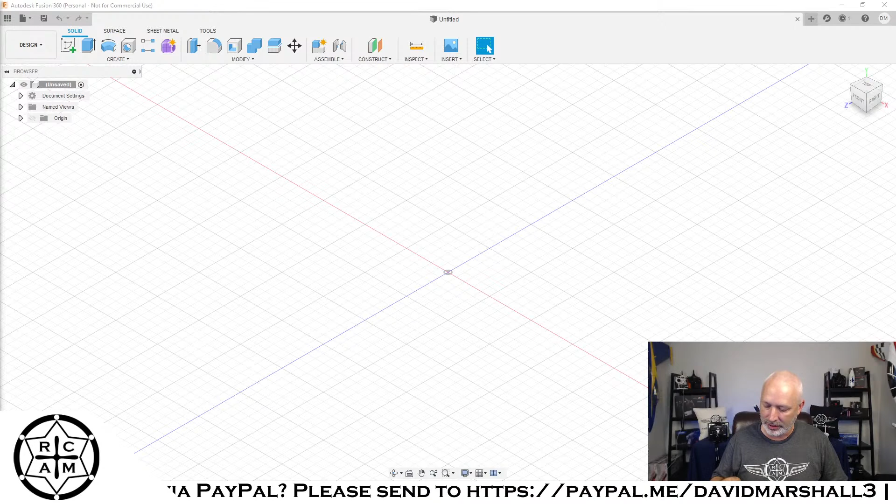The first thing I'm going to do is measure out this little GPS module. Like I said, it's right about 20 millimeters wide. Yeah, it's right at 20 millimeters on all sides.

So the first thing I'm going to do is make a box that is about 20 by 20. I'm going to make it a little bit longer.

Colorado's burning on fire. Hope you're all right, man. Stay out of that. Stay away from the fire.

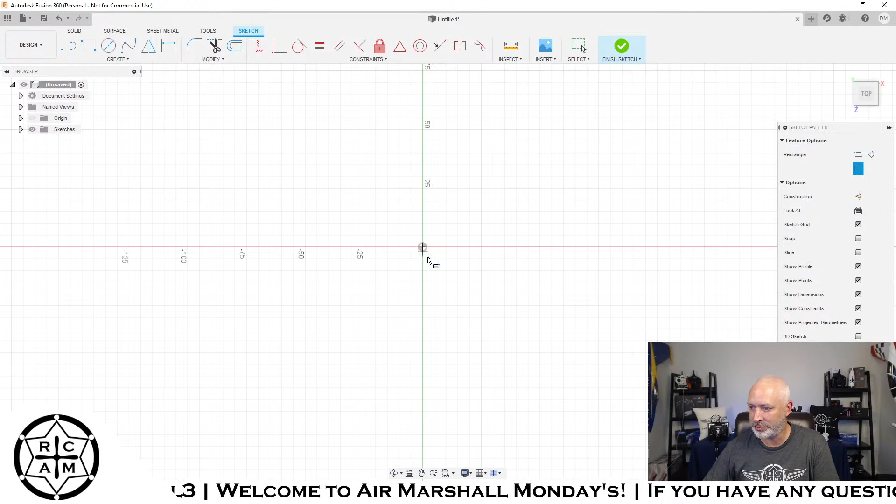That's bad. So we're going to do a center rectangle right here on the origin, and we're going to make it 20, actually 20.1, just to add a little tolerance.

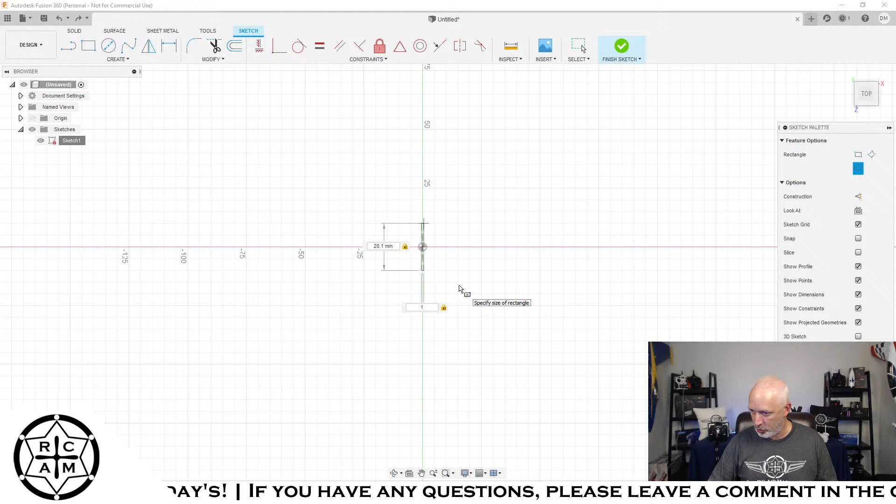Let's just delete that. So we'll do another center rectangle, 20.1, and now we'll hit enter.

So that'll be kind of the start of our little project. That's the first part of it, the first square that we're going to use.

And then we're going to do something called an offset. We're going to take that whole thing and do another square right outside of it. So we should be able to take those four lines and do... I thought we could do something. Cool.

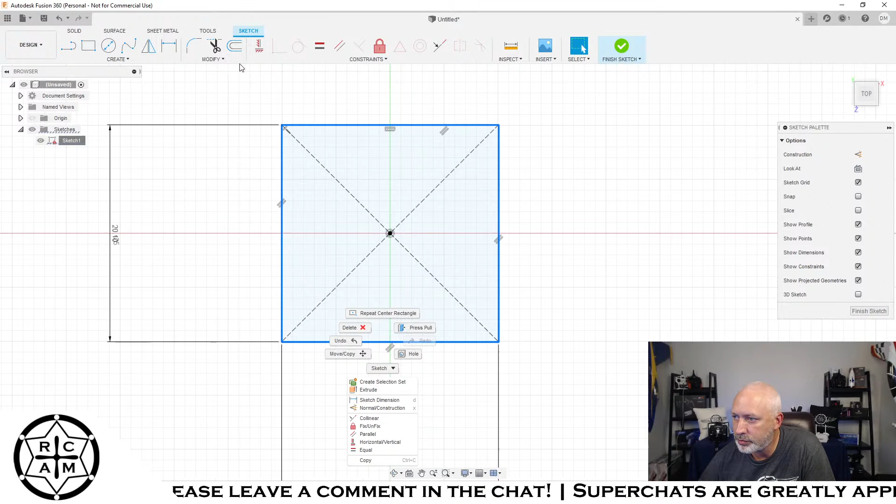Well, we'll just do a whole new center rectangle, because I also want a standoff in the center that is about 0.75 millimeters away from that. We also want the surrounding area to be 2 millimeters, so we have like a 2 millimeter wall that surrounds the GPS module. So we're going to do another center rectangle that is 22.1.

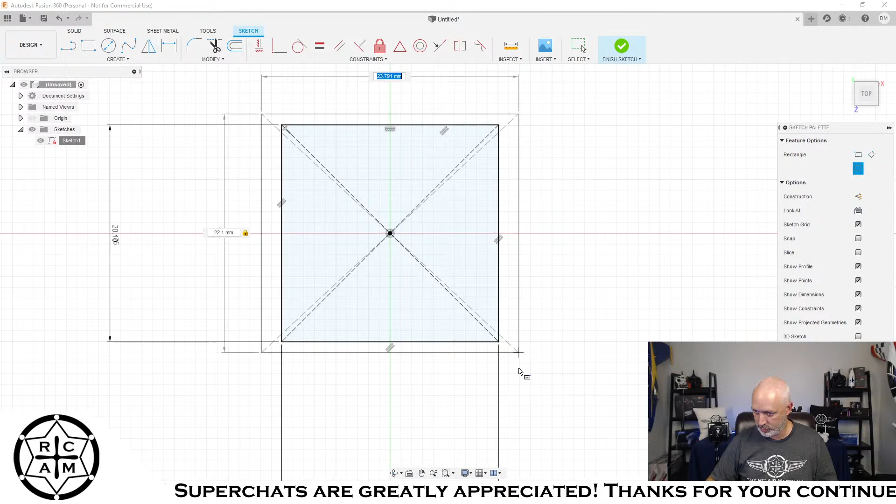All right, so that's going to give us our external walls. And right on the inside, we want about a 0.75 millimeter standoff that the circuit board is going to sit on, on all sides, and that is going to lift the circuit board up off the base of the mount. There's little plugs on the bottom that need some clearance. I don't want it sitting on those plugs, I want it raised above them by just a little bit. So that lip it rests on, on those four sides, is going to be about 0.75 millimeters thick.

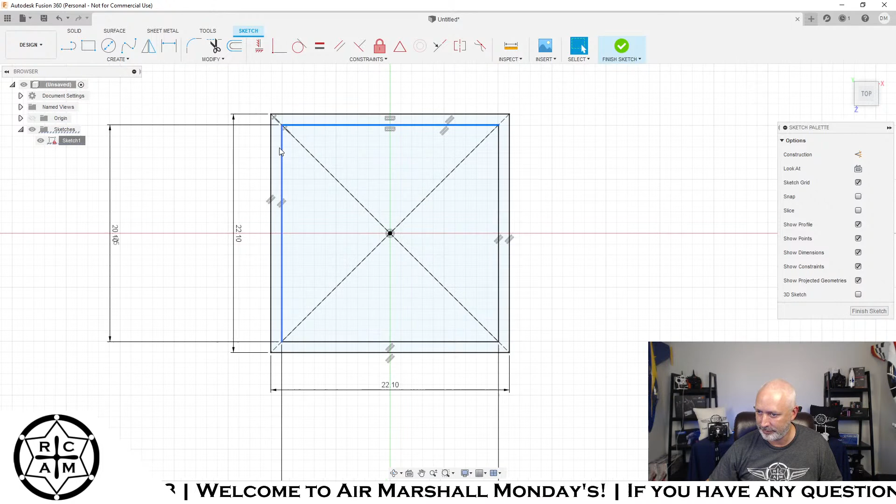And that's where it would come in really handy if I could remember how to do the offsets. I don't remember how to do that. I should probably watch a video of someone doing this who's smarter than I am.

There it is. But that's not what I wanted to do an offset of. I want to do an offset of that. Oh, I get it, okay.

So we want to go in by negative 0.75.

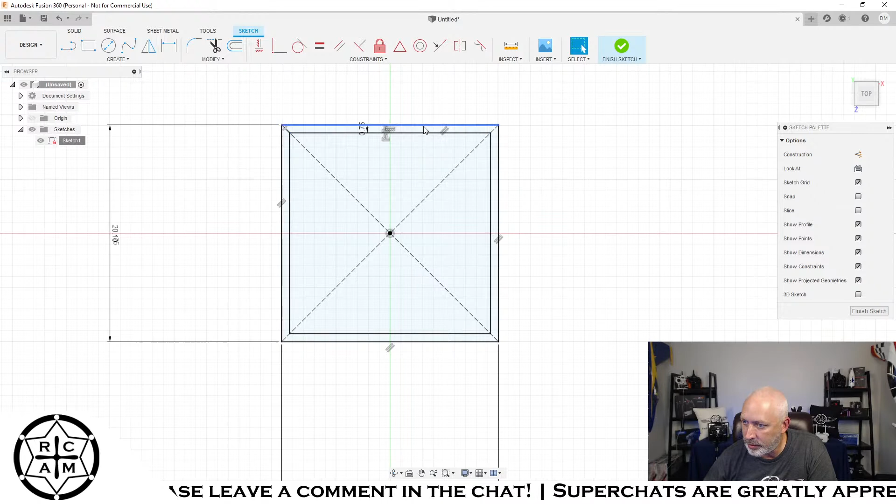Awesome. And also that one is a little messed up, so we're just going to delete that whole guy right there, and we should probably delete all the dimensions associated with it. Okay, and we're going to do another offset of that outside that is 2 millimeters instead of 1. We'll go 2 millimeter offset.

Perfect, all right, so now we've got our base sketch. And what we're going to do is go ahead and finish that sketch, and we're going to start extruding some things, right?

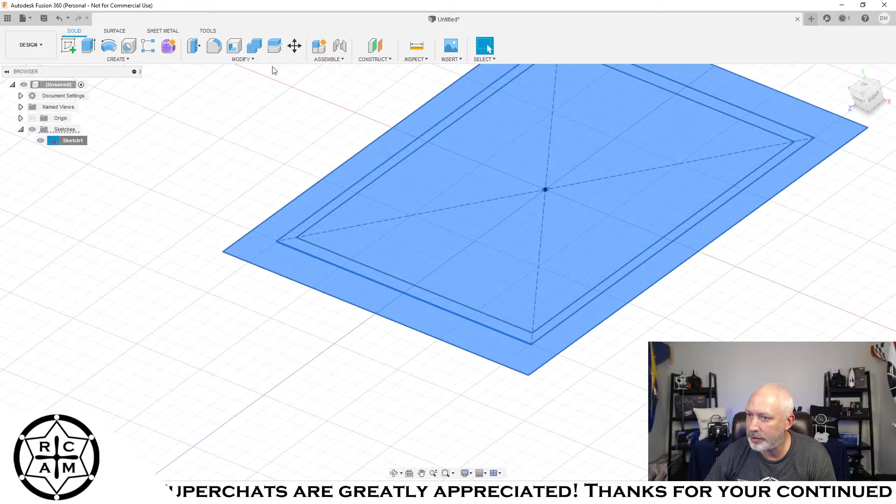So we want this whole thing, all of these areas, to be 2 millimeters thick on the bottom, on the base. So we're going to extrude it up by 2 millimeters. Come on, thing, do what I want. Awesome.

Oh, you know what, I just kind of messed up a little bit. Not really, I probably should have done that first, but this will still work. We can show that sketch again, and we're going to draw everything else up from the bottom, and that's fine. Actually, we could still do it from the top.

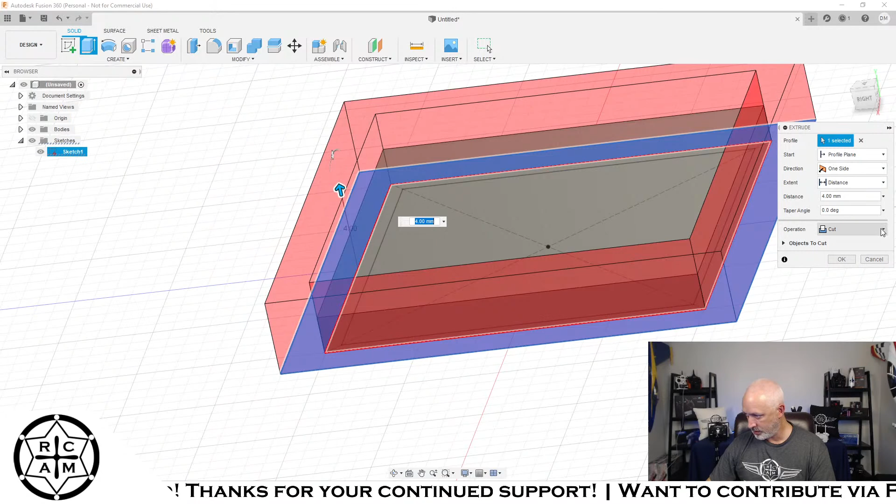So instead of cut, we're going to join, and we're going to hit OK. So that gives us our initial tray.

Now we may need to come up from there a little higher, just based on the height of the circuit board that I'm working with. That is, let's see, 4.35. We're actually going to make it just the same height as the rest, which is 10.73. So we'll make it 10.75 tall. So this has like a little bit of a protective shroud around it.

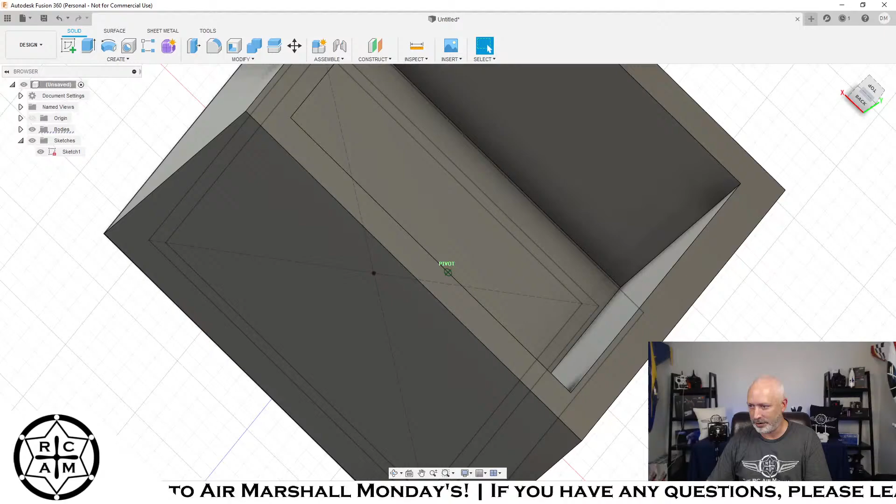So if it gets knocked by anything, it hopefully won't destroy it. So we're going to just raise that. We'll go ahead and make it 11, so we're going to add 9 more millimeters to the extrusion here. That's going to make the box a little bigger than it used to be, and that's okay. That's exactly what we are looking for, a little box for this thing to sit in.

Now, the next thing that we want to do is we want to raise that offset that will allow this thing to be sitting a little higher, or not sitting directly on those plugs. There's little connectors on the front and the back, and I don't want it sitting directly on those connectors. So we are going to make some small standoffs that are just slightly taller than the plugs.

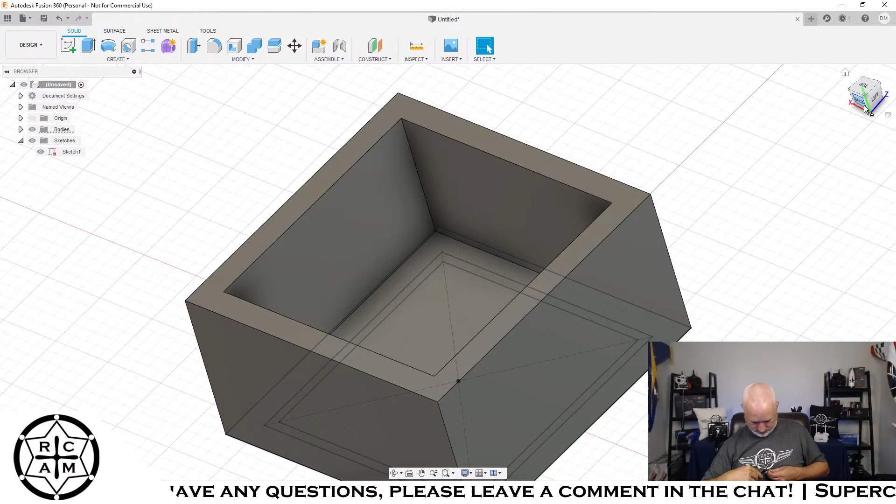And the plugs look like they're about 3.1 millimeters. So I want those standoffs to be about 3.5 millimeters, which will leave us about a 0.5 millimeter gap between the plug and the bottom of this little case that thing is going to sit in.

And you know, we're kind of extruding from the bottom, which is a little weird. I just kind of messed it up. I probably should have made the initial base square first and then extruded from there, but that's not what I did.

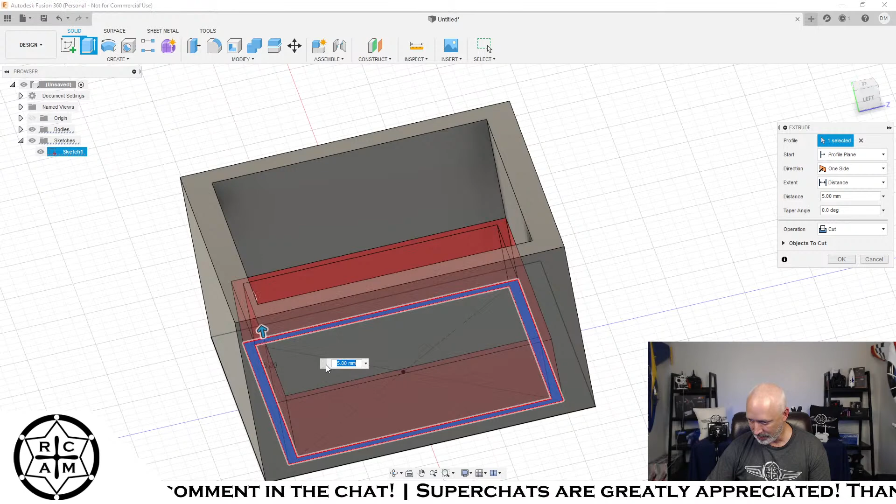So we're going to go ahead and tell it to extrude. Now this is already 0.75 millimeters, so it's the right thickness, and as we extrude that up, that's our initial 2 millimeters, and we need to go another 3.5. So we're going to make it 5.5.

Oh, oops. So we want to delete that last extrusion. I accidentally did cut instead of join. So we're going to do that again. 5.5. Join.

Okay, all right. Now what we'll see is around the perimeter of the box, you can see that there's a small ledge, and that small ledge should be 3.5 millimeters tall.

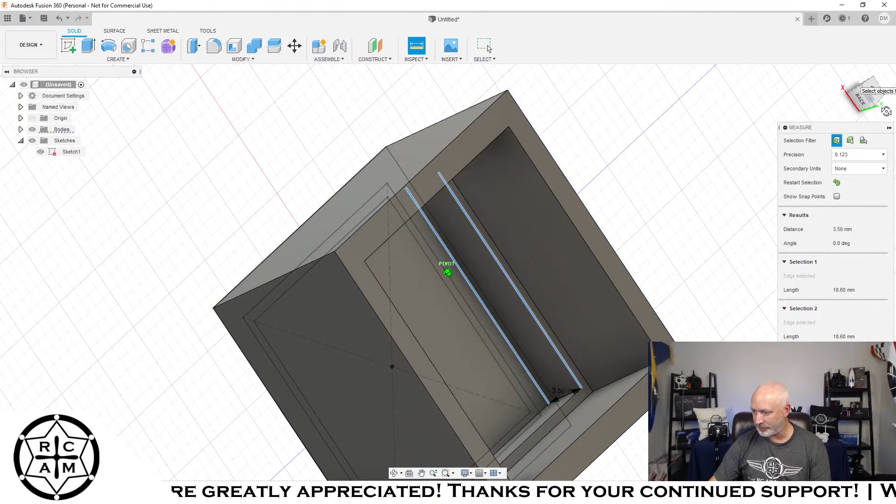And what we can do is if we want to check those dimensions, we can do inspect. We can measure from here to here, and we can see the dimension in there. It has right over here that it's 3.5 millimeters. We can see also here the distance is 3.5 millimeters. So we did extrude it the right height. It is 3.5 millimeters tall, that standoff, and that's going to give us the room that we need to allow the circuit board to rest on that standoff instead of the bottom just sitting right on the bottom of that base.

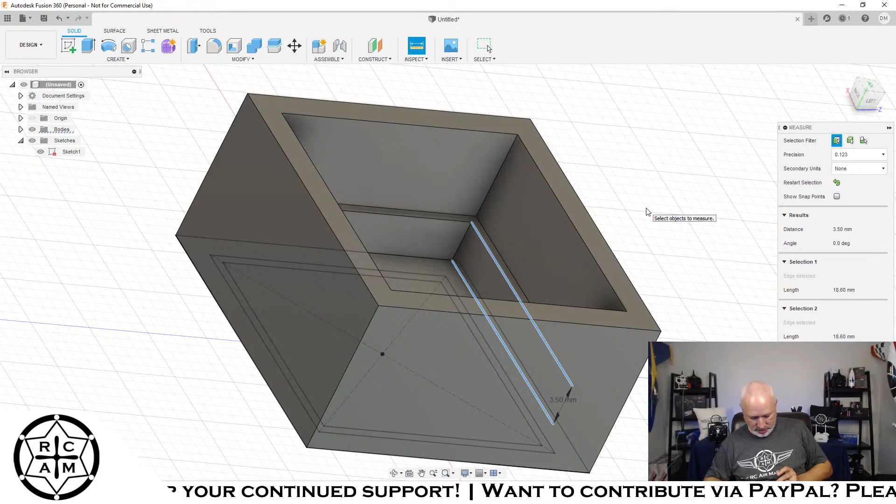Now, the next part that we need to figure out is we do have a plug that goes into the bottom. So where this thing is going to sit down in that case, I need to have an opening for that plug. Now this is perfectly square, so I can have that opening basically anywhere that I want, and I need to have that on both sides. One will just be a cutaway, and the other will be, we're just going to remove that area.

We can go ahead and close that measurement. The other one will be removing, hold on, let me get this oriented the way I want it. And we can turn off that sketch because I don't need that anymore. So basically what we're doing is we're going to cut a hole out of the back of this thing.

And on one side, and on the other side, we're just going to cut a groove into this standoff where it can sit down in there properly. So we're going to start on the area, we want that to be the back of the box. So we're going to start a sketch on this surface of the outside of the box.

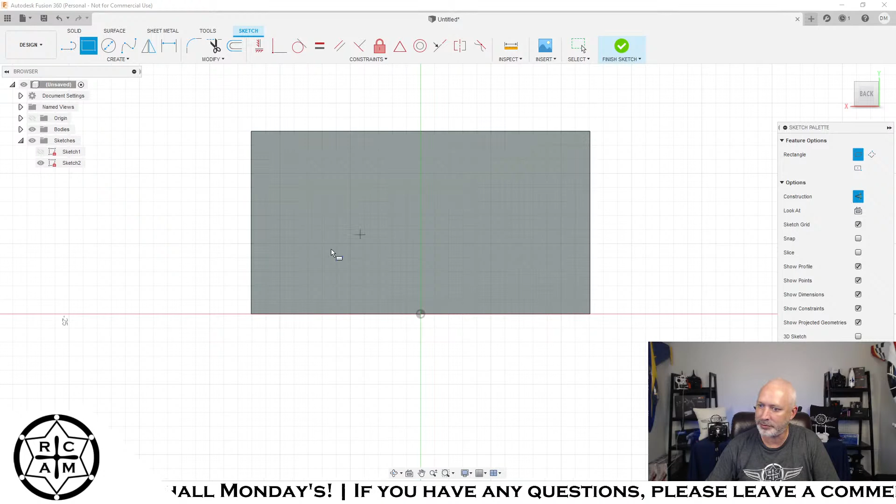And the first thing we're going to do is we're going to draw a construction rectangle that is 2 millimeters tall and the entire width of the box. And the reason we're doing that is because that is going to tell us where the base is. So 2 and 24.10 is correct.

Now, everything above that line is above the actual floor of the case, right? So we're making like a little case here. So what I want to do from here, we also want to make another construction rectangle that is 3.5 millimeters tall. All right, and what that's going to do is it's going to tell us where the top of that ledge is.

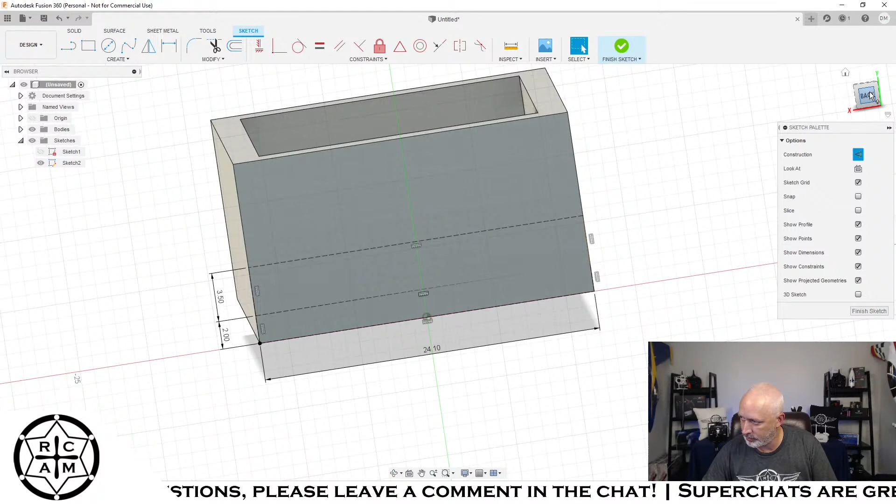Now what we want is a hole created right in this area where the plug for the GPS module can go into, with it sitting down into the case. This is the back of the case. We want to measure how far it is from the side of the plug.

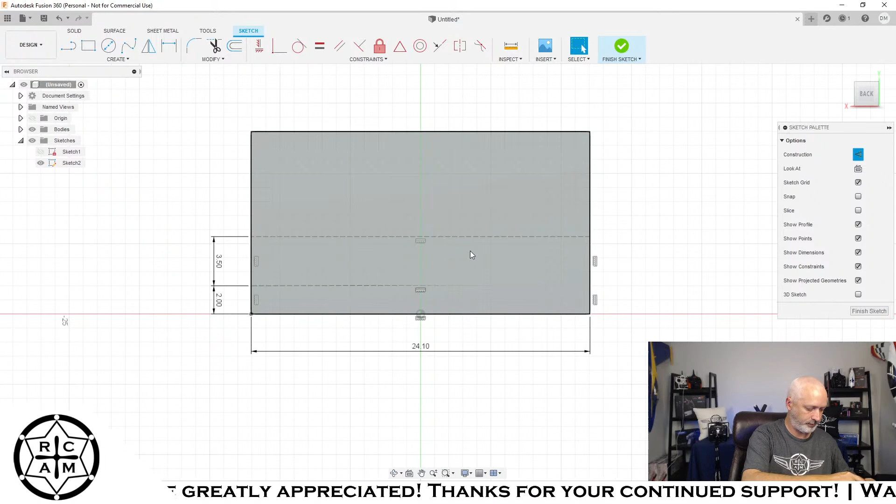That's 5.88, so we'll do 5 millimeters. It looks like we can just do 5 millimeters on both sides, and that's going to give us the clearance we need for that plug. So we're going to do 2 more of these.

And these construction rectangles are more like reference points, right? So that's 13, and we'll do 5 millimeters. We'll draw one more that is 13 by 5 millimeters.

All right, and we're going to go all the way to the floor, and we'll go 1 millimeter above to make sure we've got plenty of clearance there between those. So this next one that we draw is not going to be a construction, because it's not for reference. This is actually going to be a cutting tool that we're going to use.

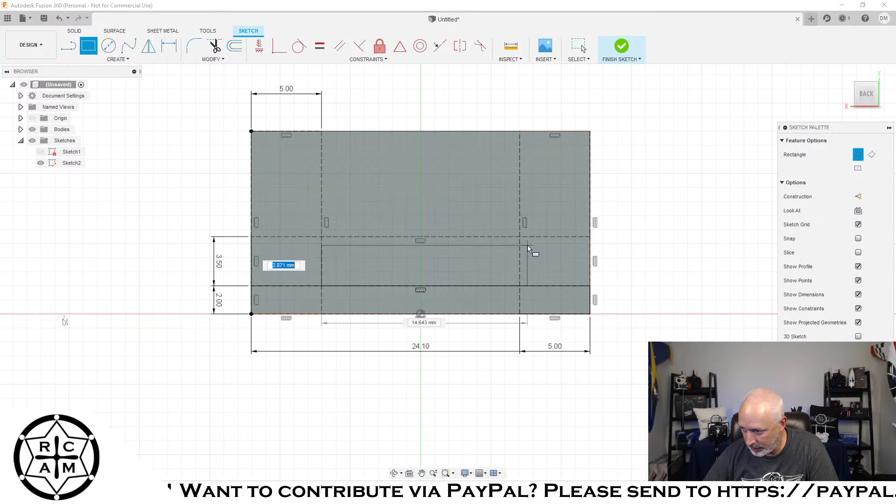So that's 3.5, so we'll make it 14.1. Let's see what the actual measurement is there, because I know I'm giving myself some extra room. Yeah, the thing is only 8. I know what it is - the sides are also 2 millimeters.

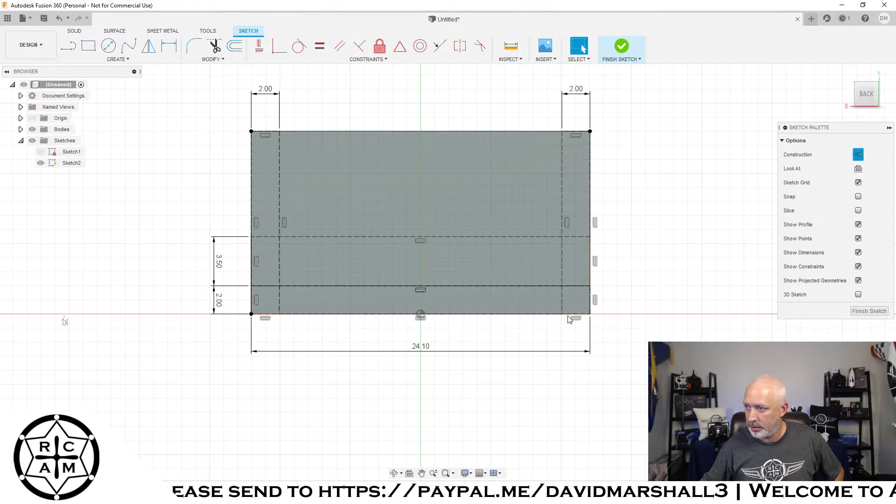So we're gonna do - so that was 5. We're gonna create a couple more construction rectangles because we need to have all of the walls correct on here that we can use as references. So that gives us all of our walls, and now we're going to do another one that is 5 millimeters.

Offsets. And now that should give us the right size that we need. So now we can do a standard rectangle.

Let's escape from there. We'll start it from the other side, we'll start it from the bottom, so as we extend it, it'll go up. And we're gonna make it 4 millimeters tall, about 0.5 millimeter taller than where that sidewall is.

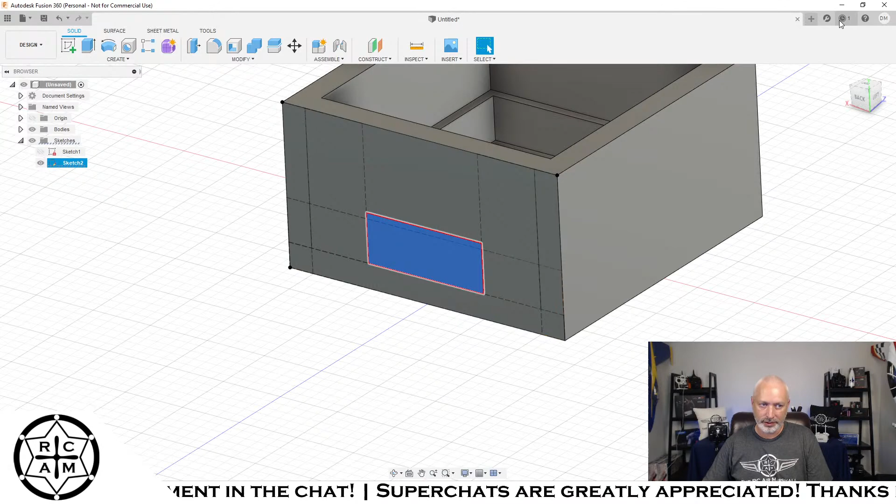And what we're going to do is a little bit of cheating, because I need that cut out on both sides. So we're going to finish up the sketch here. We're going to take that square and use it as a cutting tool to cut a hole through the entire thing. All right, so we're going to extrude that and hit OK. That gives us the hole we need on the back.

We don't actually need a hole on the front, but we do need that relief, and we need the relief to be immediately across. So what we're going to do is a little bit of cheating. We're going to take that surface right there, since we didn't need to cut a hole all the way through it, but it was just more convenient to get that piece in there and cut away that backside. So we're just going to extrude that back down 3.5 or 4 millimeters and close that gap back up and join it.

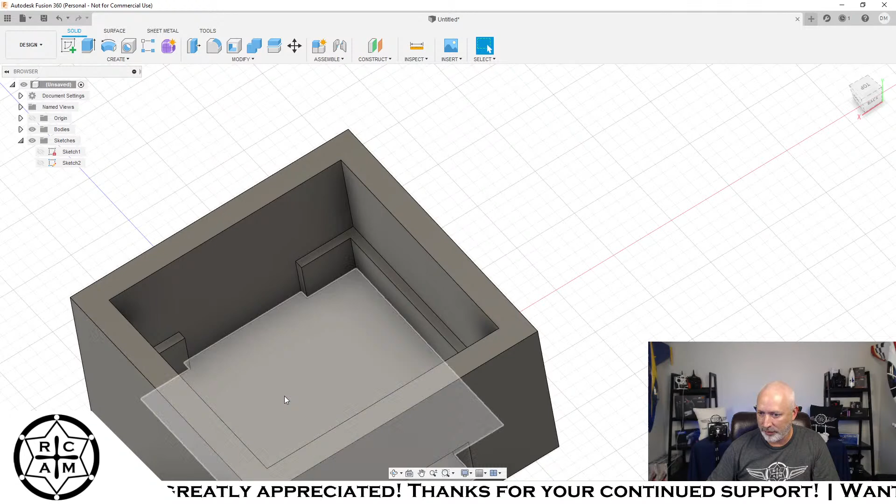So now on the inside we've got a hole on the back, as you can see, and on the front side we've got that little recess in there where that standoff is. So now where the plugs are on the GPS unit, it will fit down into where those standoffs are and allow us to have that seated with the edges of the circuit board resting on that little shelf that's inside the box, and the plugs are not going to interfere with anything.

And on the back side of the box here, we've got our hole so the plug can go in there and mate into the socket that's on this side of the circuit board. So that is pretty much all that we need to do for our box.

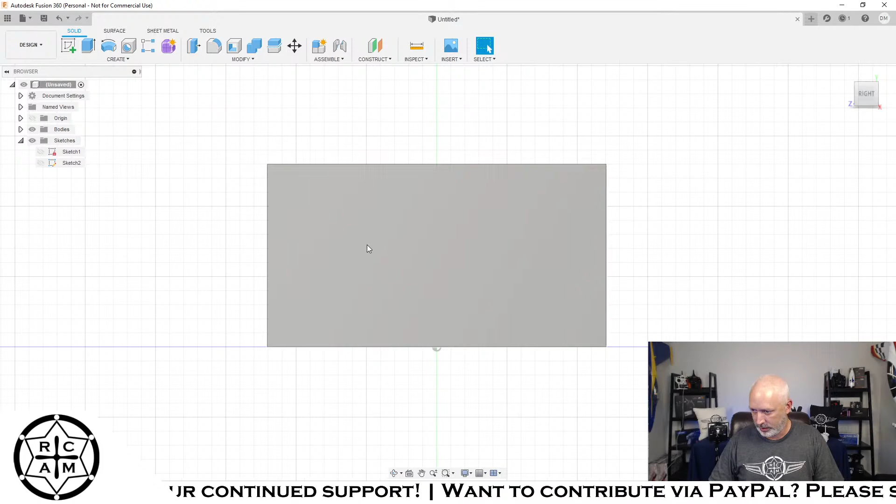Now the next part that we need to do is we're going to take - let's see, probably the easiest way to do this - and we'll go back to the full screen view here. Give me just a second. All right, so this thing is kind of polarized. We're going to go back here to this because it'll be helpful for you to see how this is made.

This is a mounting bracket for the antennas. All right, so I've got my crossfire antenna that goes in that little area, and it just shoots across the back of the quad. And I've got this, and this is where the video antenna mounts, right?

And what I'm going to do is this box that I'm building, I want to epoxy onto this flat spot right here, and then go straight out, and this GPS unit is going to sit about like that, right? So we know about where we want that to sit.

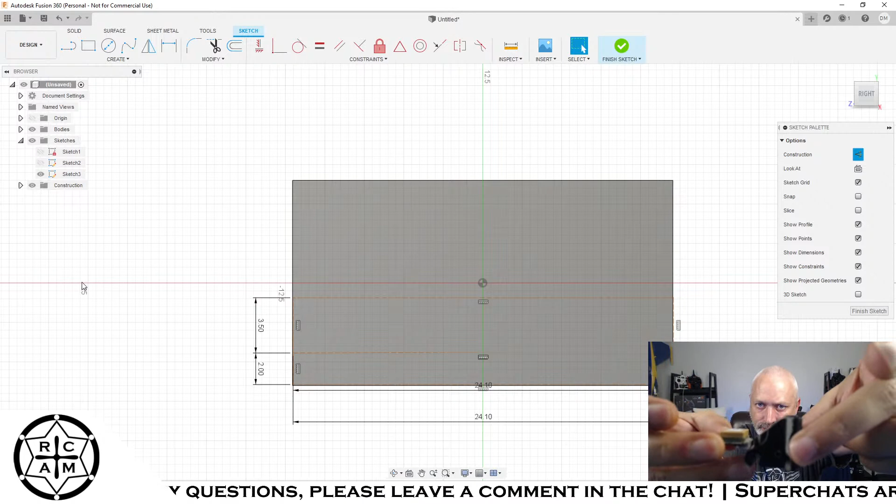All right. So the way I want this to sit is just like this. So I want the start of the slope to start where that offset goes up, and I want that slope to also be 2 millimeters. So what I'm going to do is, starting from this point, I'm going to create a 40-degree, basically rectangle that goes up, and we're going to go from there.

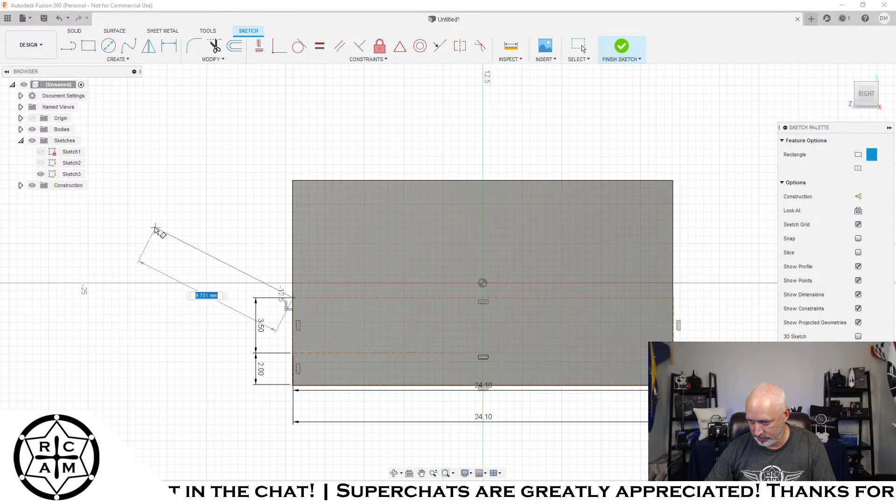So the way that I'm going to do this is I'm going to create what's called a 3-point rectangle, which allows me to select, let's see, we don't want that to be construction. We want that to be an actual 3-point rectangle. Now this should be telling me roughly what the angle is too. So that is trash. So the first thing we'll do is we'll just create a construction line at the right angle to make sure that we get all that right.

So let's see, that's 180. We want that to be 140. And we can just have it going out to, you know, generally anywhere. But we want that to be a 40-degree angle, so we can see that arc on the top there is at 140 now. And that's going to give us that 40-degree angle that we need. And we'll do another one there. Okay. And you'll see why we did that one here in just a second.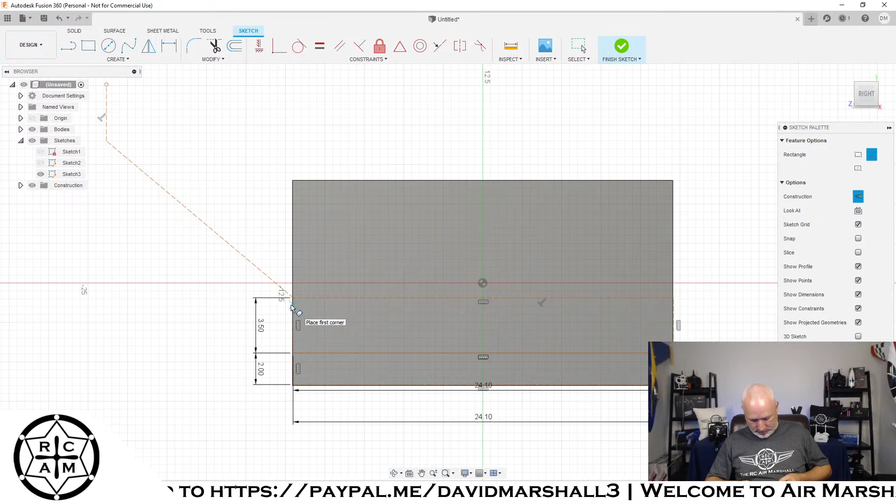Now we'll go back to creating that 3-point rectangle. We don't want that 3-point rectangle to interfere with the SMA plug of the antenna. So we're going to make it about 10 millimeters, you know, it's going to come about 10 millimeters up, right? So we'll draw the first point here, and then we want that to be 10.

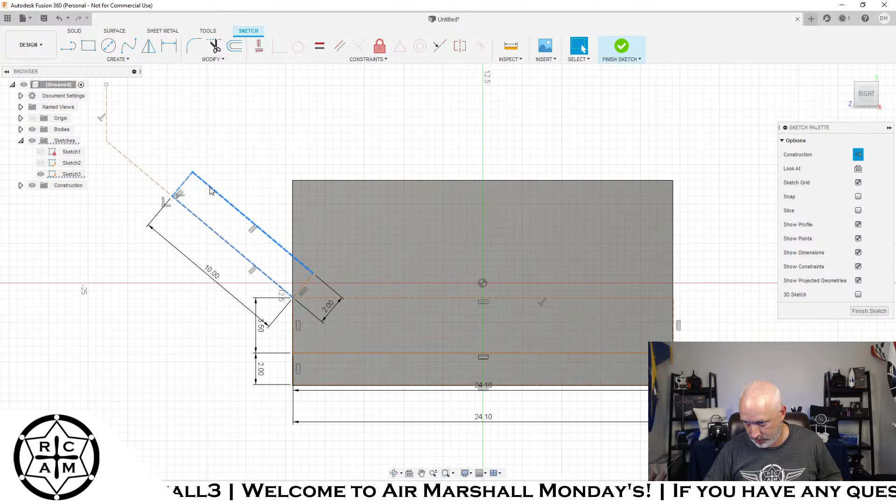All right, and we want it to be, let's call it 2 millimeters thick. Uh-oh. And that's okay. We'll be able to change this. I don't want all of that. We will change those to actual build lines. And we're going to draw another line that goes from here straight down.

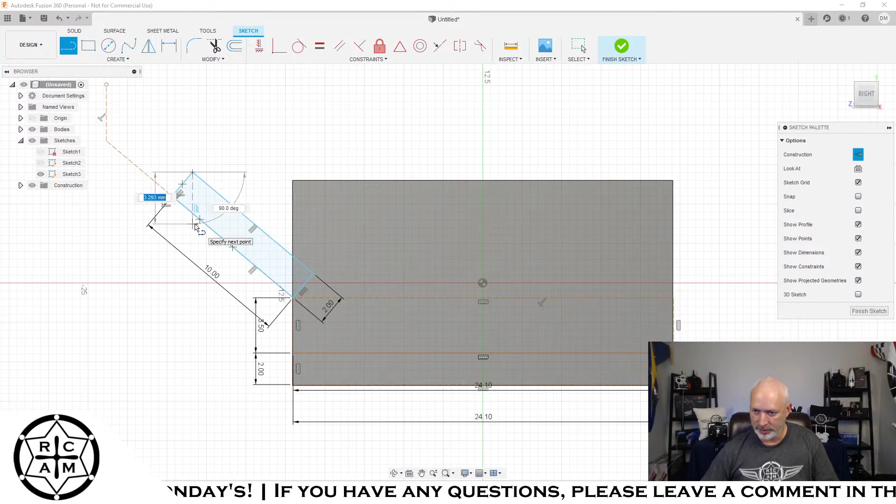And I think, yeah, if we hold, well, we're just going to eyeball it. Actually, we'll just run a little further through it. That works too. Why does that keep doing construction lines? I want that to be an actual line too. All right. So what we did is we made like this little shelf. Now I'm going to go ahead and finish that sketch. So now we've got this funky looking shape here.

And what we're going to do is, I don't believe that shape extrudes into the body at all. But we're going to basically run that shape all the way through the original body. So we're going to extrude that this way.

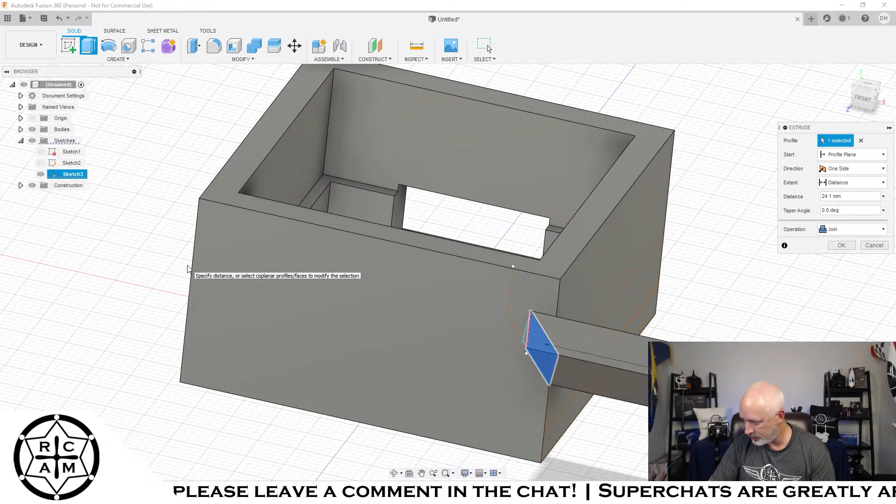24.1. Negative 24.1. And we're going to tell it to join and hit OK. And now you can see we've got a little 45-degree shelf there that's going to be part of the print. And what we're going to do here to add some strength to that shelf is right up here.

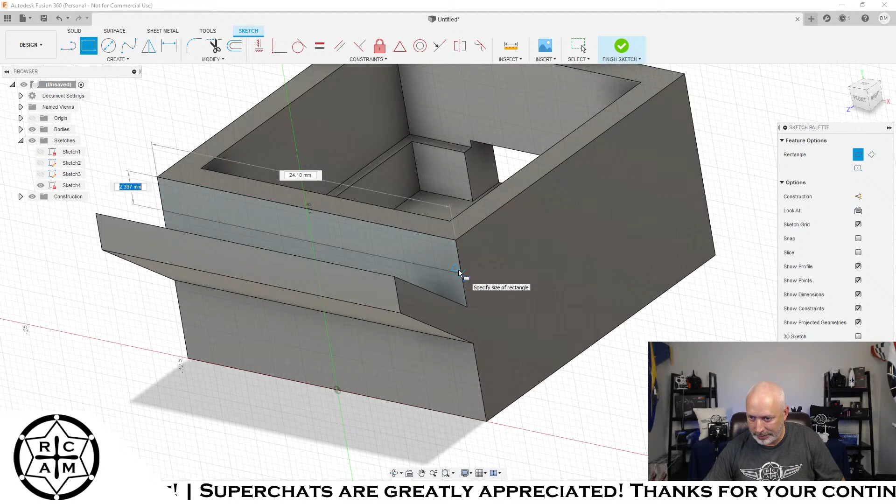We're going to do another sketch and create a rectangle, 2-point rectangle that is 2 millimeters, and it's going to stretch the entire length. And we're going to finish that, and we're going to extrude that out this way. And that should be plenty. And we're going to hit join and join those together.

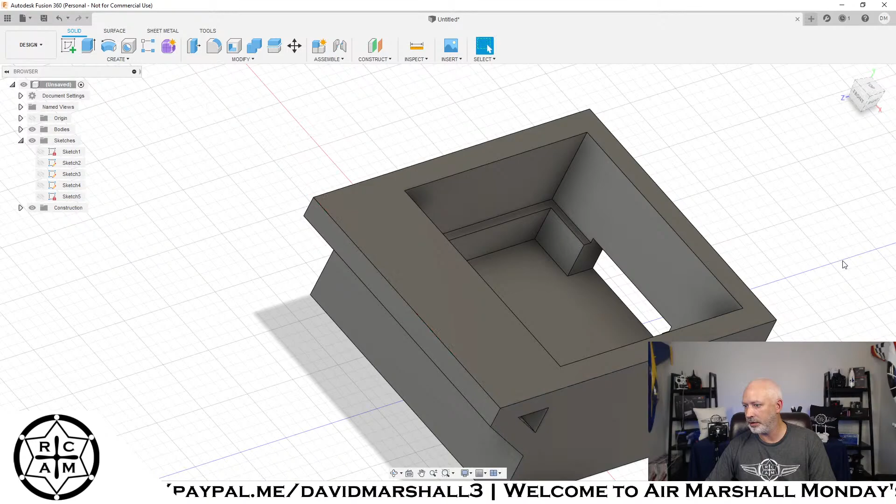And let's see. We're going to get rid of that weird looking thing up here. So right up here where we got that funky little tooth looking thing that sticks up, we're going to get rid of that. So we're going to do another sketch here on that side. We're just going to draw a simple line that goes from here to here. We'll finish that sketch. We'll highlight that. And we will do an extrusion across the whole thing and do a cut. And it cuts that right off.

So now you can see that I've got that 45-degree area that's going to get epoxied onto the mount. And the last part that we're going to do is we're going to make 2 little clips on the inside of the box. And we're going to put those clips right up here and over here. And what those clips are going to do is they are going to kind of snap the circuit board down into the mount. And when that circuit board gets snapped in, it will allow us to not have to worry about gluing it down or anything.

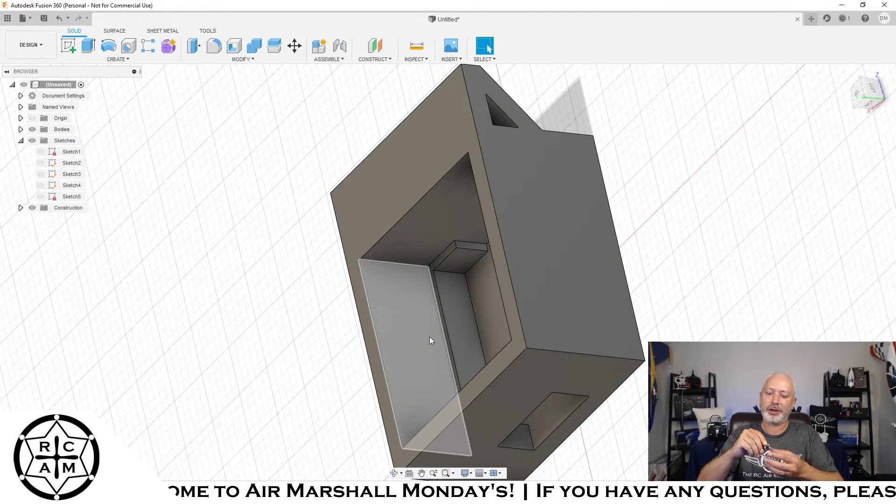Now, really, the way this thing is designed, once I put that plug in, it's pretty much going to hold it in place. But I want to have those little snaps there to make sure that it's not going to come out at all. So right on the side and really right in the middle. And we're going to have to do this on both sides here. I'm going to create a sketch here.

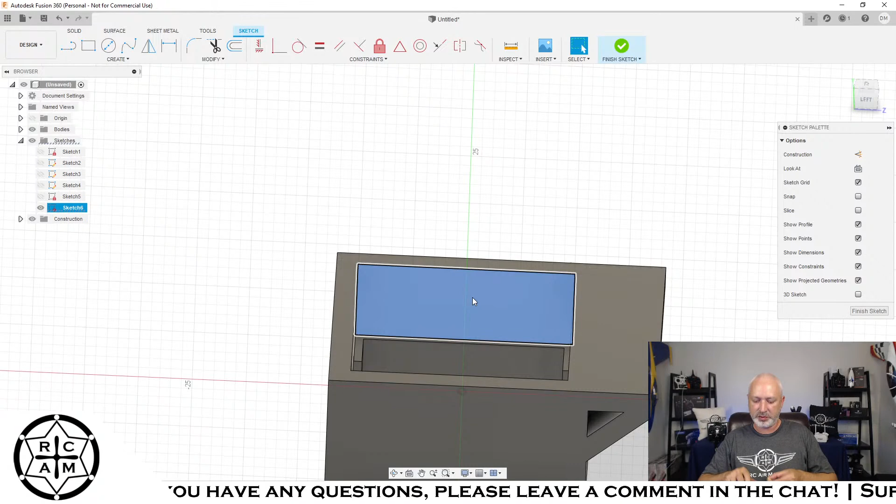And so we want that to be the thickness of the actual PCB, the actual silicone wafer there. That probably won't focus, but there's a GPS module that is on top of a little silicone board. So I'm going to get the thickness of that silicone board, which is 1.25, pretty standard PCB thickness there. So I'm going to draw inside here.

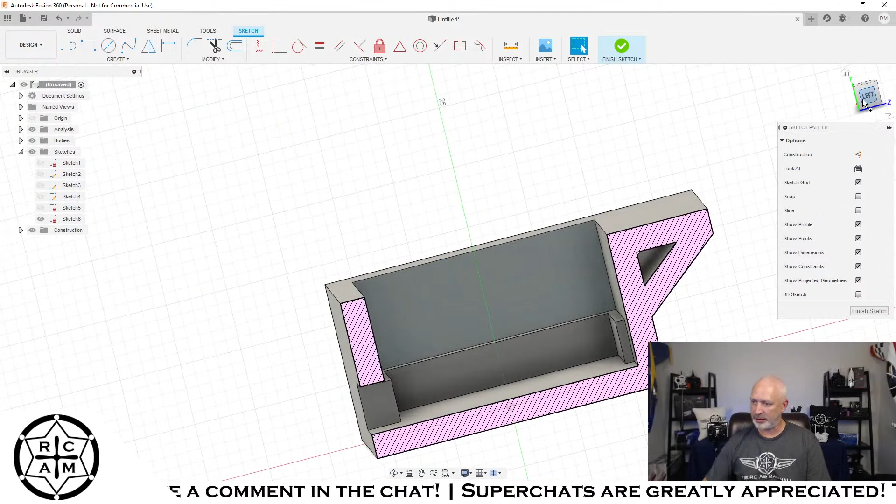Actually, the first thing I'm going to do is, oh, what do they call that? Where can I do this section? Generated to cutaway. So we're basically going to cut that in half, which will allow us to get a better view of the inside here. And then we can turn off that section analysis at any time, right? So we can turn that on and off.

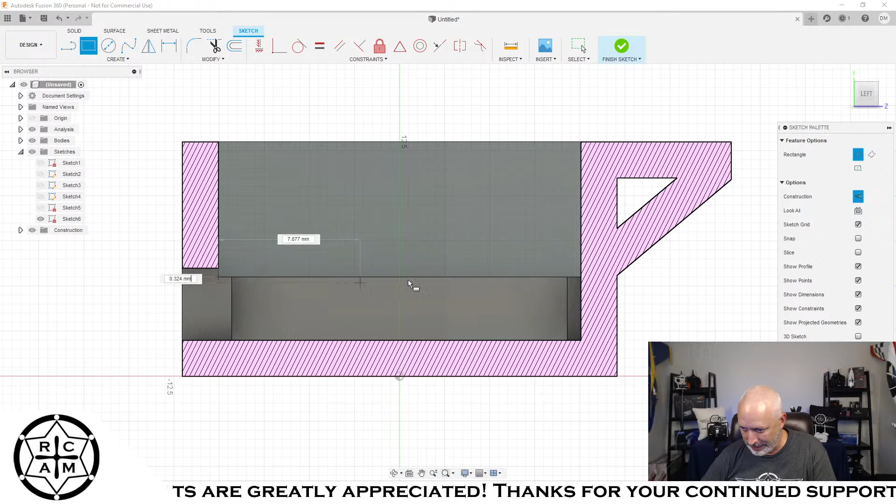But right now we've got this split where I can see the inside of the box now, and this is where I want my little clip to be at 1.25 millimeters above this shelf. So what I'm going to do is create a reference rectangle, construction rectangle, that is here to here, and it is 1.25.

Ah, dang it. Where did that go? 1.25. There we go. And it's going to stretch the whole length. So that is roughly the width of my circuit board, and I want there to be a small little clip right there that the circuit board's going to snap down into. So what we can do here, like how big do I want that to be?

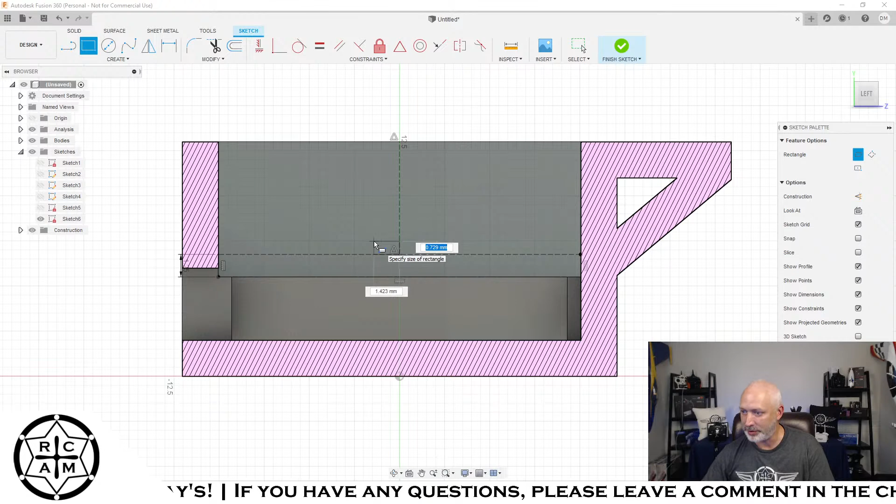Let's see. So I'm going to do another construction line right up the middle. And we'll see what I'm going to do with that here in a second. We'll draw out what is going to be our little retainer clip. And I want that to be, say, 3 millimeters thick. And let's call it 1 millimeter. No, we'll do 0.5 millimeter tall. And 1.5. All right. So that works.

And then we're going to take that area and we're going to mirror that on that line. Oh, we're going to mirror. No.

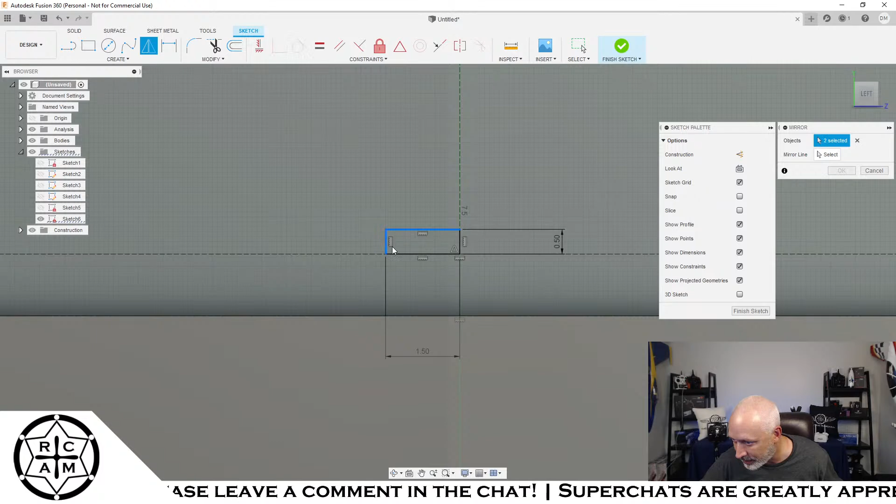Okay. And the mirror line will be right here. And we're going to hit OK. And that makes it exactly the same width on both sides. So that's awesome. That's exactly what we want. And we will go ahead and finish the sketch. And now we have these two objects here that are going to be our little clip.

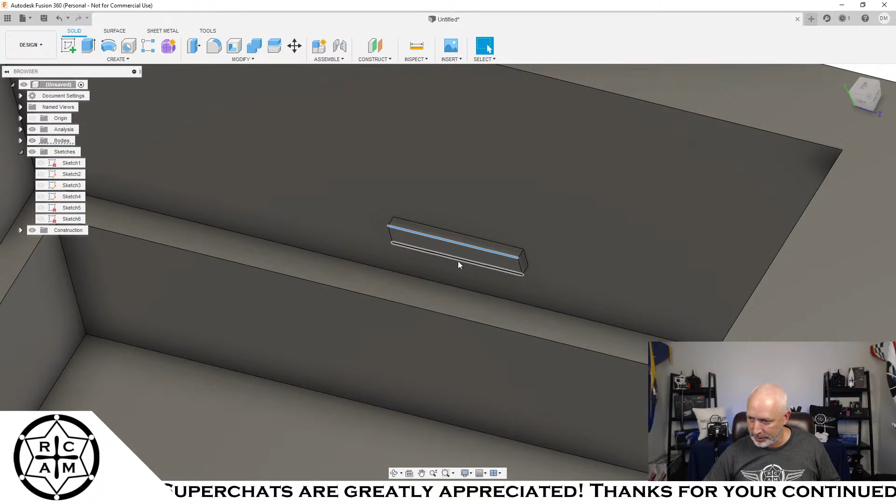And we're going to extrude that out by, let's call that, oh man, this needs to be really small. We'll call that 0.25 millimeters. And what we're going to do is right here on the edges, we're going to add some fillets, and they're going to be tiny. 0.25 should make it a nice round clip,

as we see there. So it's basically just going to add a little bump into the wall, and when I push that down, that little thing is just gonna clip in and kind of hold that circuit board in place, as long as all the tolerances are correct.

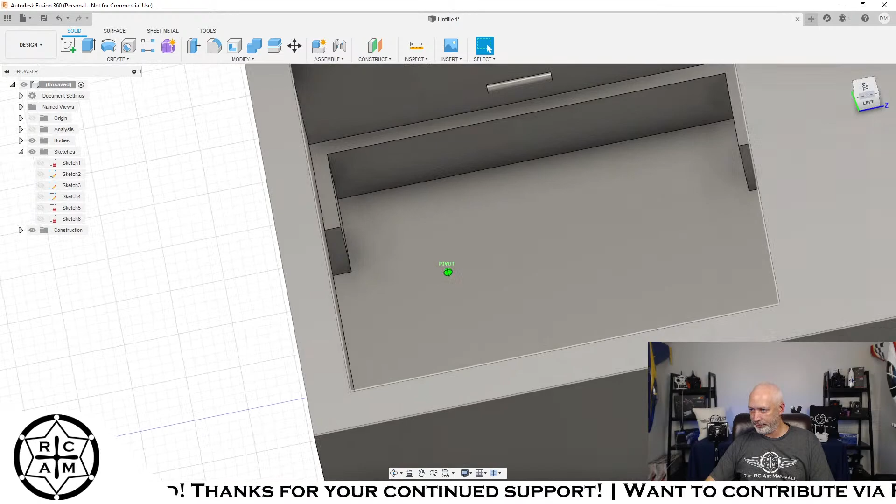Okay. So now what we can do, because this is exactly the same on both sides, I hope, is we're going to take this whole little thing here. Uh-oh, that's not what I wanted. And we're going to split that. We're going to take this side and we're going to create a sketch here. And what we're going to do is we're going to project that object onto this sketch so we can copy that exactly.

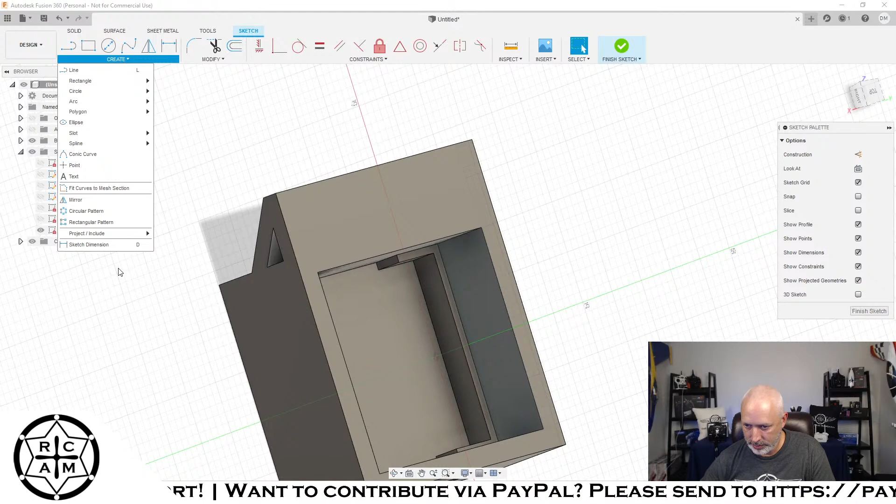So what we want to do is project that, and as we can see on the other side, now we have a projection of that body on the other wall that we're working with. So we can create a 2-point triangle that covers that wall exactly. We can finish the sketch and we can extrude that body

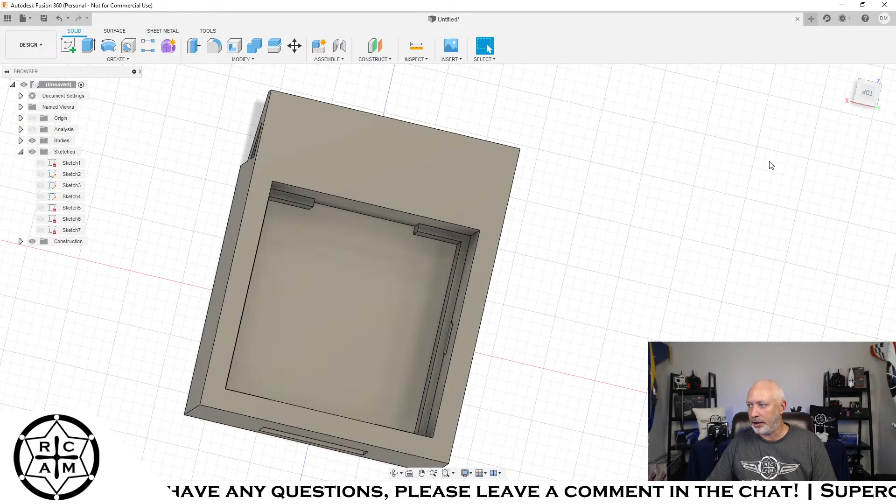0.25 and then do the same thing that we did on the other side, where we create those fillets on the top and the bottom that are also 0.25. So we're going to do fillets 0.25. All right. And that gives us another retaining clip in exactly the same spot on the other side using that project tool. And that pretty much completes our little mount that we're creating for the GPS module that's going to get mounted to the back of my little quad.

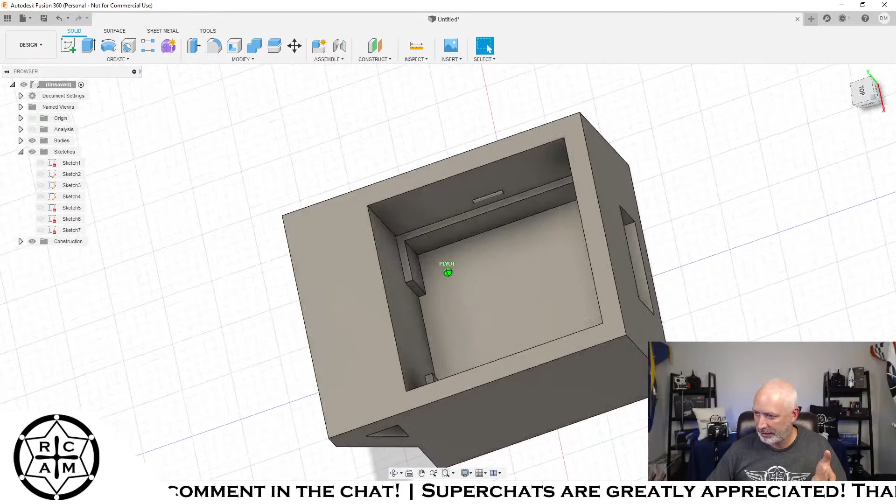So I do have to apologize. While I've been doing this, I've just kind of been talking along my process and not really paying attention to the chat. So what I want to do is kind of go back to the chat here, and if anybody has any questions or anything, I'd be happy to answer those. Why can't I move stuff around? And yeah, I'd be happy to answer any questions that anybody has, or explain any of these funky processes that I've been doing, or whatever y'all got. Anybody got any questions? All right. So, not many people have been saying anything. I'm guessing that people are just watching, which is cool.

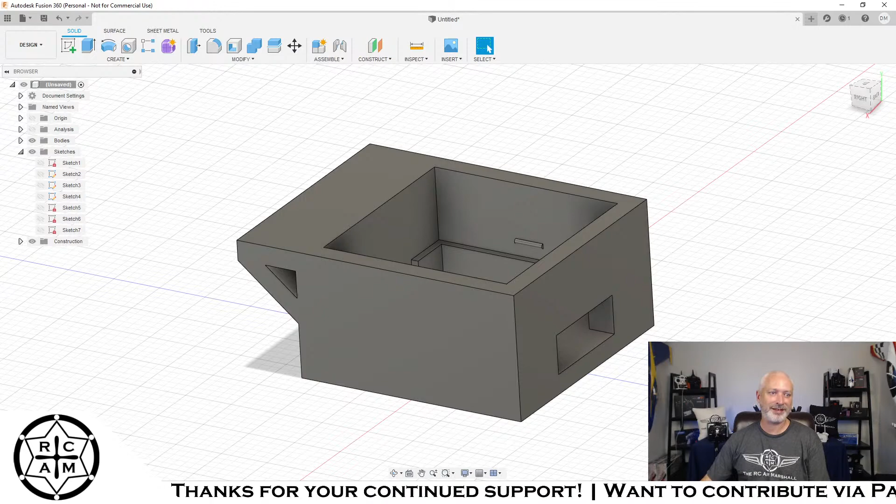Yeah, so Dana's RC, if you're still in here, Joseph Youngblood's recommendation of the Prusa Mark III. If you're not worried about money and you want the best printer that you can buy, that you're not going to have any issues with, I mean, you're still going to have to calibrate it and all that stuff. But the Prusa Mark III, they're pricey. They're going to run you about $700, but it's got everything. It's got all the bells and whistles. It's got the best electronics, the best stepper motors, the best power supplies, all the best stuff.

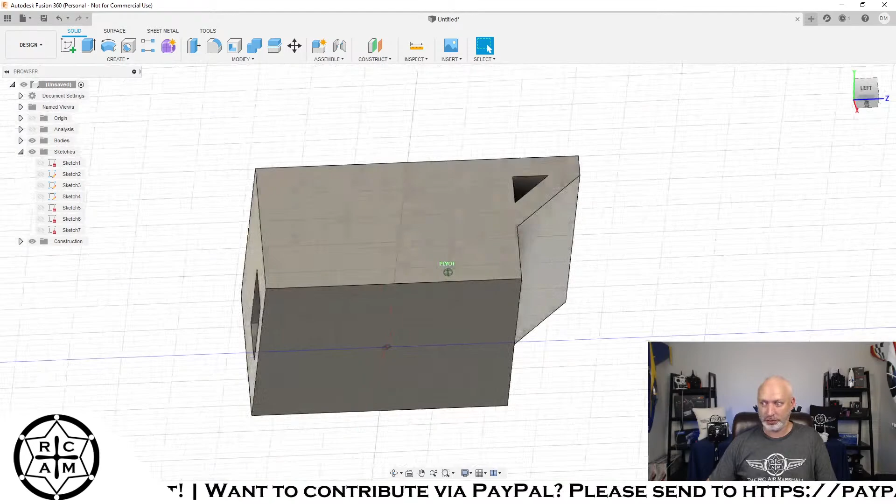And it's got a heck of a company to back them up that support their products, which you may or may not find if you're going to try to use a Chinese product. As we all too well know in the RC world, some companies back their products better than others. So if you're interested in a 3D printer and money is not necessarily an object, the Prusas are not the most expensive printer out there, and they are most certainly not the cheapest, but it is the best printer for the money if you're willing to pay that much. If you're not, there's a lot of options out there, and it really depends on what you're looking for.

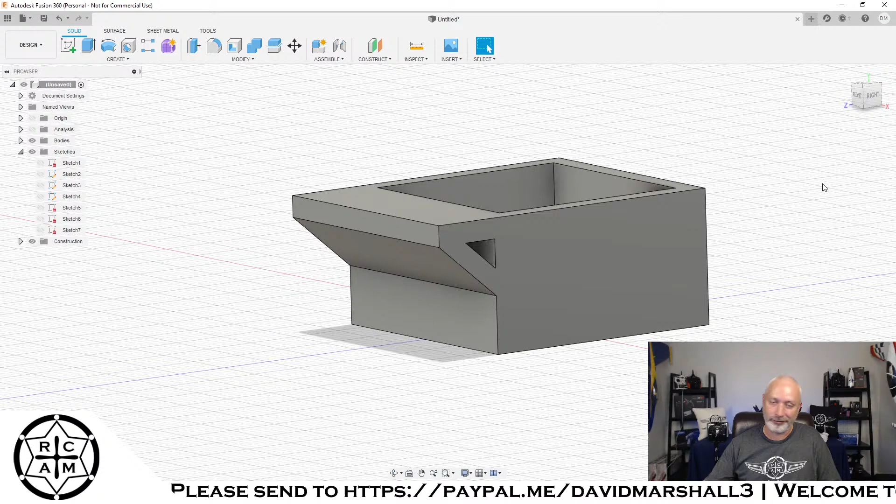My kind of go-to option is the Creality Ender 3 Pro, which is a heck of a printer. It's been out for a while, it's well established, and it will do stuff like this all day, no problem. So if that's something that you want to try out, you can pick those up for between $200 to $250, depending on where you find it. If you do a little hunting on Amazon for a Creality Ender 3 Pro, you'll probably find them somewhere in that range of $200 to $250.

Let's see. Oh, there is a high performance F-22? That must have just come out recently.

Oh, you know, I don't mind the white background. My monitors are a high enough refresh rate that having the white background doesn't bother me. There's no flicker, and it's higher than fluorescent lighting. So I don't worry about it. I don't mind the white, and the white offers a higher contrast level for me to see individual parts and pieces on there.

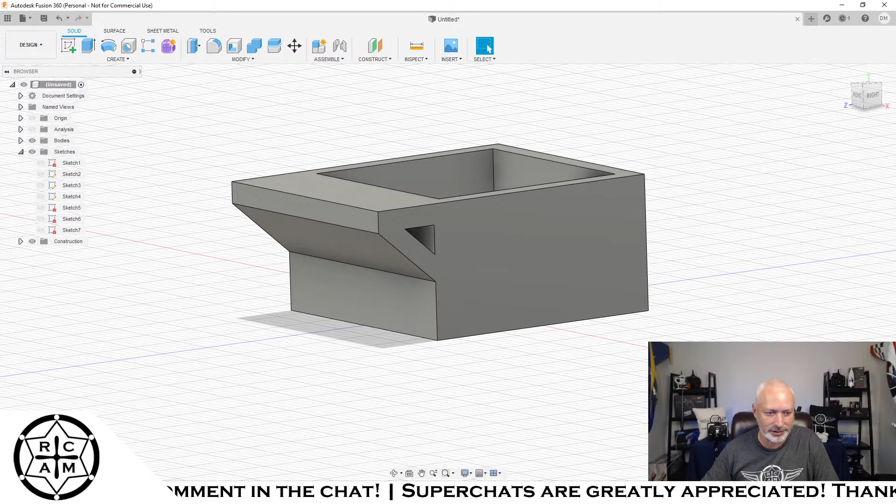Joseph Youngblood, this part is probably going to take about an hour to print. But the nice part is, where else are you going to find a mount for this little guy? That was what I was doing, creating a mount that this little GPS module can fit down into, so I can add GPS to my quadcopter.

And I just needed something that would go on the back of here, kind of like so. And this should fit the bill perfect and allow me to mount that on there. I'm going to epoxy that mount that you were just looking at to that flat spot right there. And it should hold very well.

I'm really trying for the... I mean, there's too much hair there, man. If I was to go completely slick, dude, I'd cannonball this baby. But I'm just doing the short hair.

But yeah, this is gonna take about an hour to print there, Joseph Youngblood.

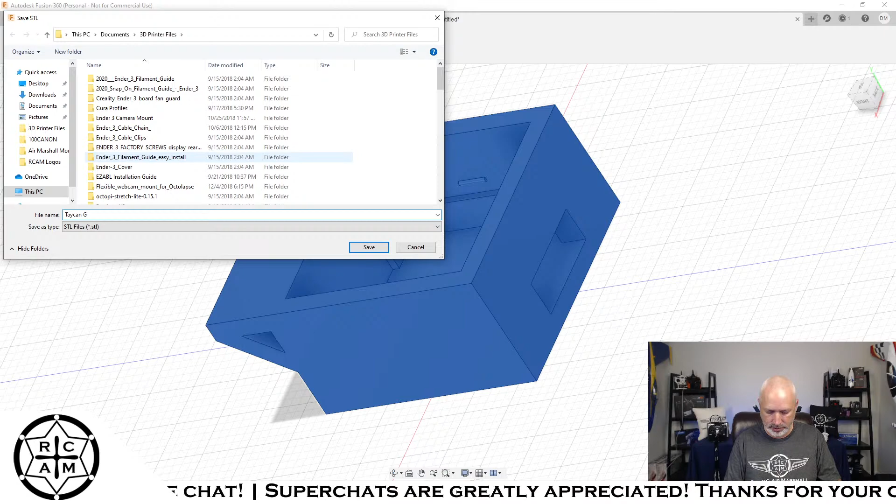So, anyway, guys, I hope that watching me draw out little weird things in Fusion 360, little oddball mounting brackets and things like that... actually, what I'll do is go ahead and take this and prep it to 3D print. So what we're going to do is set this up, and we'll call this GPS mount. Uh-oh. Taycan GPS mount. And save that as an STL file.

We will go ahead and open up Simplify3D, which is my slicer of choice. And that's funny. That's the camera mount that I have in my P47 that rides around on the servo. So if you guys want to take a quick look at that thing,

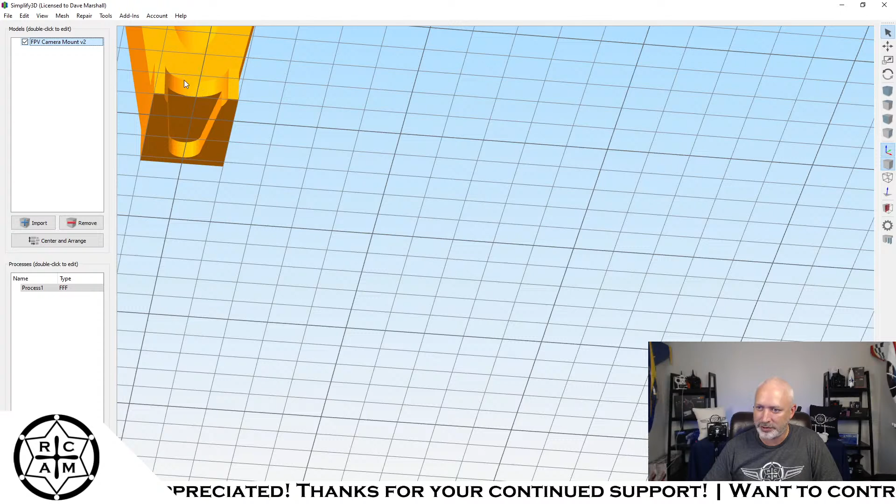it's got a hole right down in the center where you can run a screwdriver in there to tighten up the screw on the servo horn. That hole runs right down through the pedestal, and in the bottom it's also got a little relief that the servo horn goes into, and I epoxied the servo horn into that little relief, and that left the mounting screw right there. And then you just run your screwdriver right through there, and that puts the camera right on the center point, and that's your mounting holes for the camera and the whole little bracket.

So that is my FPV panning bracket that the camera's mounted to in the P47, which is pretty cool. But we're going to get rid of that guy, and we're going to put our GPS bracket in that we just created in Fusion 360.

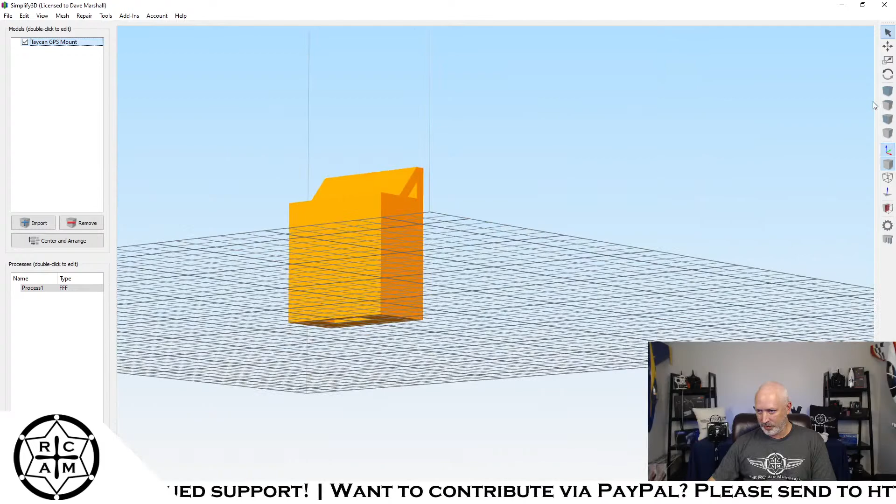What Simplify3D tries to do is orient this thing on the build table. So basically what we're looking at in Simplify3D is a representation of the build table of my printer, that gray area. And the orange part is the part that we were just working on in Fusion 360. Now I'm going to take that and do place surface on bed, because I want that to lay out flat. I think that's going to give us the best chances of a successful print.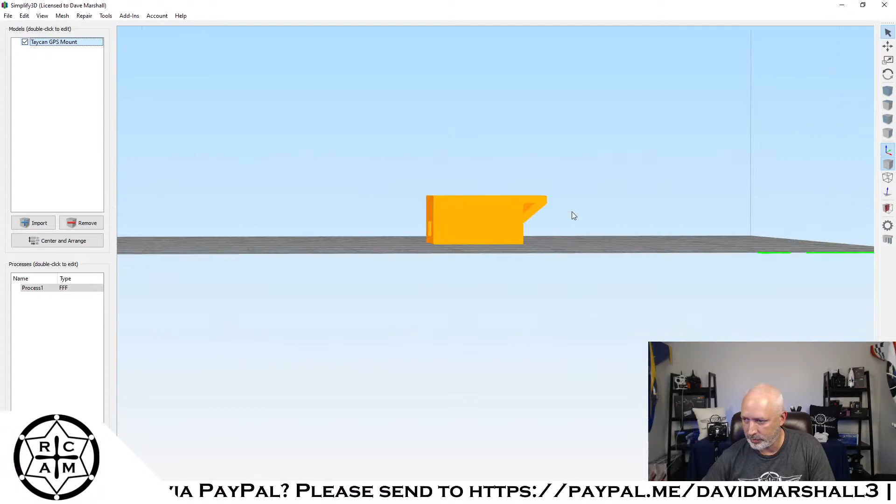And 40 degrees is a little tight, but I think, yeah, I don't think that's going to work. We shall see. So let's see what happens if we do prepare to print. Okay, so it does add some supports there.

I think I'd probably like it better if that triangle there were solid. That way I only have to do supports on the outside. I have a feeling that I'm going to have some issues depending on what way it tries to print those. So what we can do is we can run from the top down, if we can see that all of those are going to come across. So that may work like this. That's a really short distance to bridge. So I'm gonna just leave it alone and try to print it the way it sits.

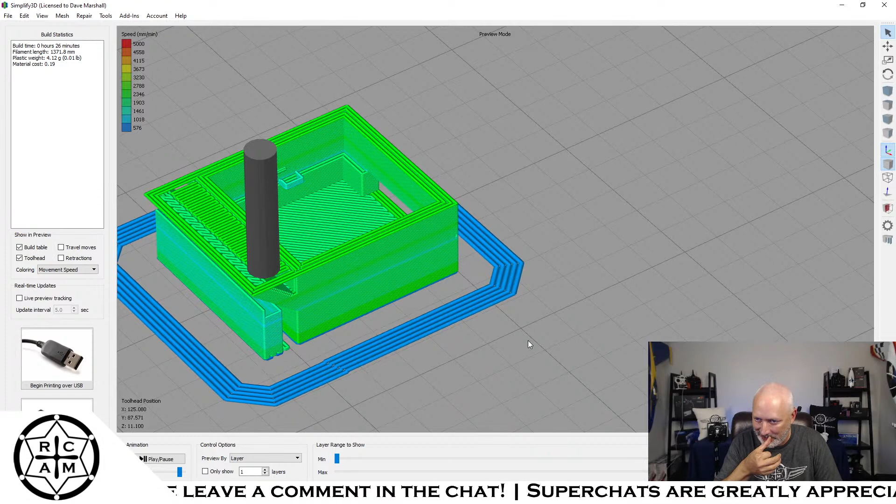And up here we can see the build time when we look in Simplify 3D, and it actually has a build time of 26 minutes. So this is going to take about 30 minutes to work. I think this is going to work, Joseph. I'm sitting here kind of analyzing the tool paths, and that distance between here and here, that's only a couple of millimeters. This whole thing is only like 24 millimeters wide, so that distance is maybe 2 to 3 millimeters that it's got to bridge right there.

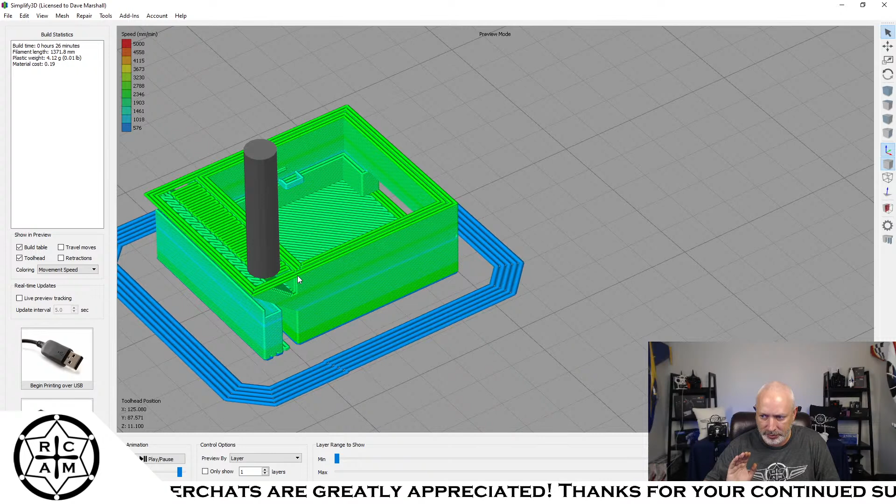And at least with my particular printer, print settings, calibration, all of that stuff, it does a really good job at bridging those gaps, especially when it's small like that. So I think that we're going to be in good shape, just judging by that it's going straight across instead of trying to go in line with that open area. I think that this is going to work out.

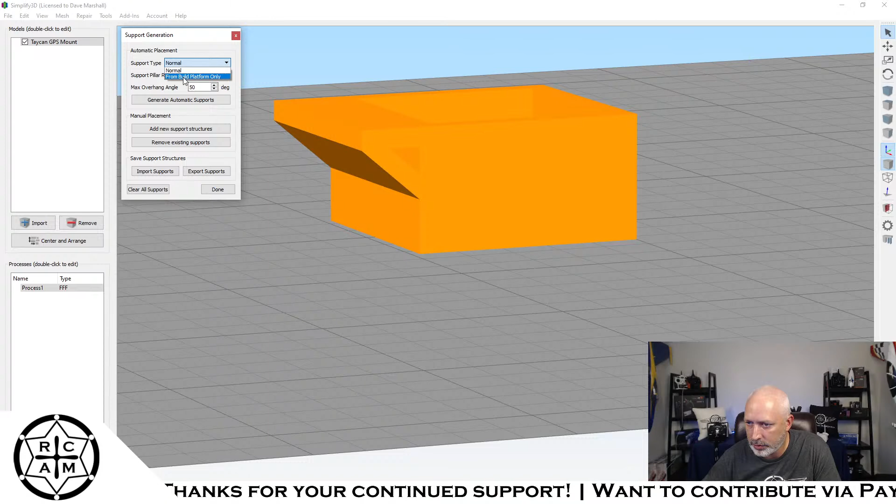What I do want is I want the supports on that 40-degree bend. I want those supports to be a little more than what I've got here. So I'm going to go back. And one of the nice things about Simplify 3D is it allows us to add custom supports. Support type normal. Build platform only. There we go. That should work a little better. I like that a little better than what we were seeing before.

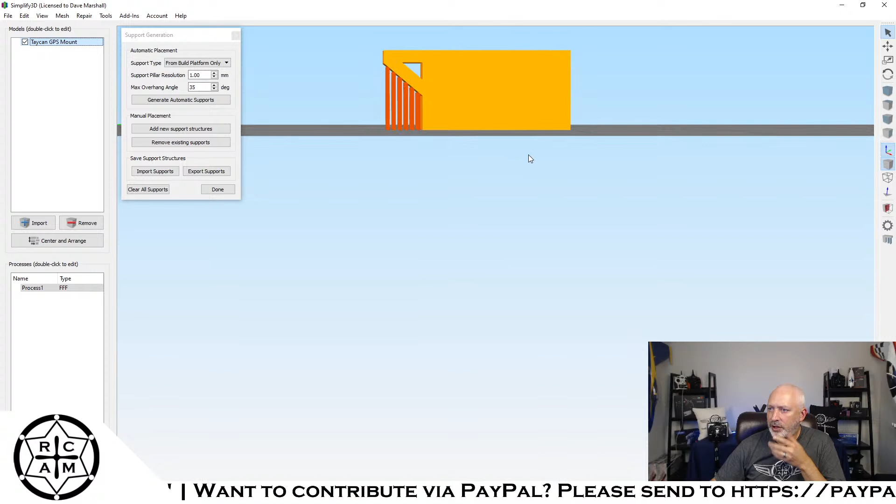Because that area can't really sag down. I need it to be correct. So, like that face is what's going to get epoxied onto this piece. So we're going to leave it like this. I am okay with that. And everything else should be good to go. So we are good now. We can go back to prepare to print.

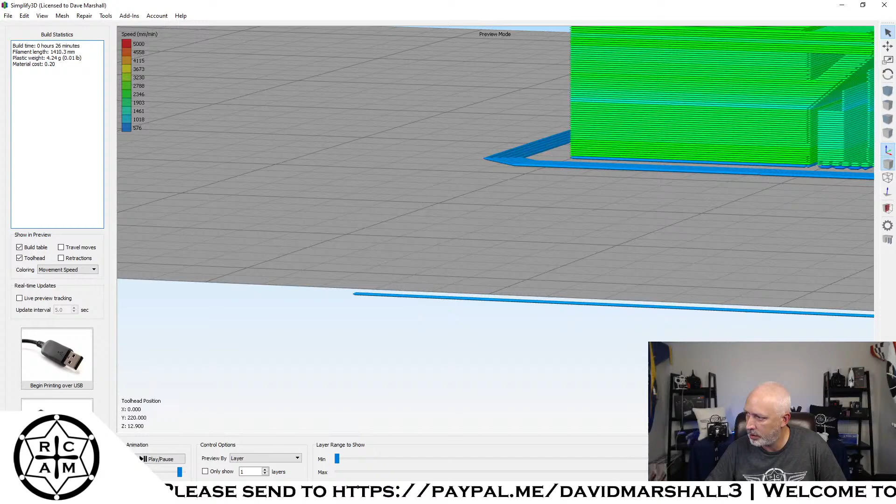Ah, it's being a little bastard. Well, we will see how it does. That's all I can do. It looks like it's going to print out fine. And we'll just have to do it and see what happens.

So, anyway, I don't think so, man. I don't think so.

So, like this way, I think works. I think it's going to work better for everything else. I can deal with just having the supports here on this angle, or I can have the whole inside of the box full of supports, which I don't really want the whole box full of supports. I'll try it both ways.

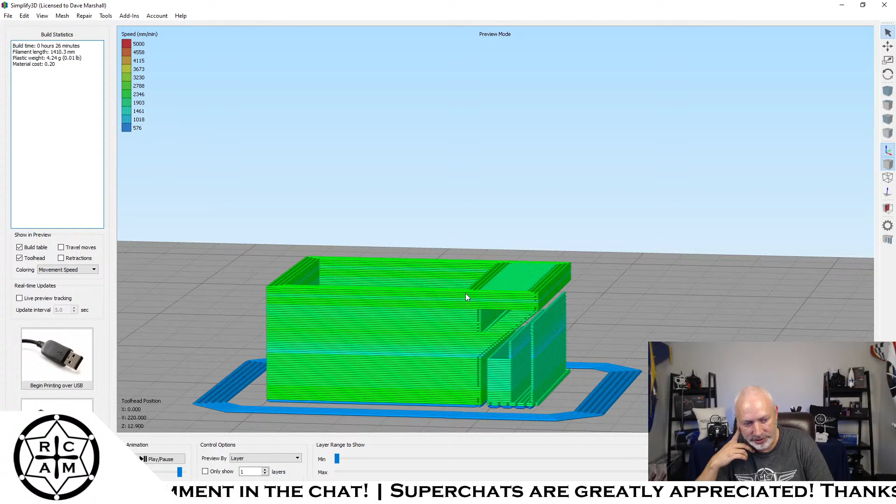And I was just looking at that. I believe that the distance from here to here, if you can see where my mouse is moving right there, that distance is only a couple of millimeters. This whole box is only 24 millimeters for some perspective. So that distance from here to here is only a couple of millimeters, and my printer is absolutely capable of bridging PLA across a gap that's 2 millimeters.

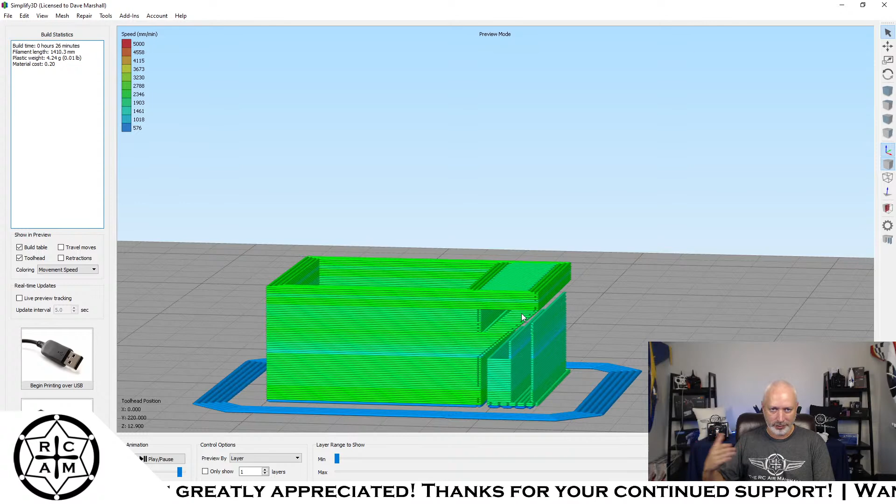I mean, it could bridge across the entire 20 millimeters if I needed it to. But we're not asking it to do that. We're only asking it to bridge a 2 millimeter gap there, and I think that it's going to be fine. We shouldn't need to have any supports in there. And I'm not too worried with that little hole that cuts through there. I'm not that worried about that kind of being ugly in there.

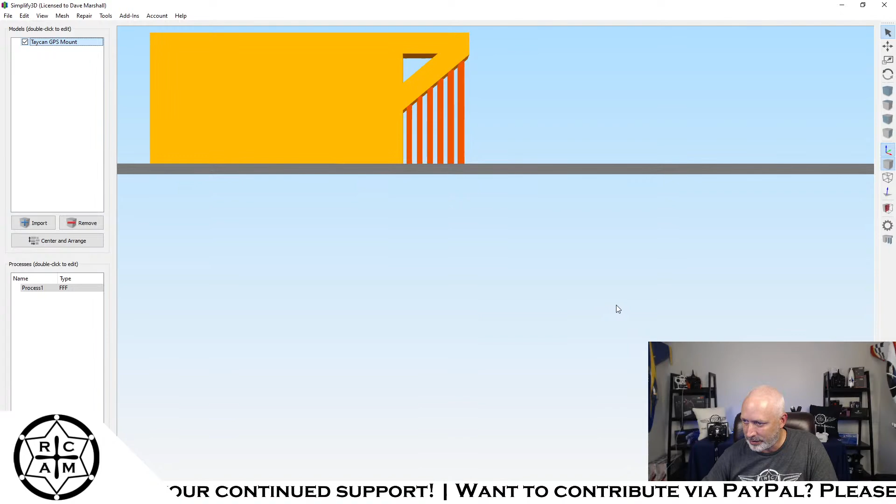This area here, I'm a little bit concerned about. And we're just going to have to see how it goes. It may be fine because of the way that this all builds up on top of each other. It's not like we're asking it to do a real thin overhang. And I do have the supports in there, but I just wish that the supports were a little better than what they're coming out as. I mean, that's what it looks like here. And then when I go to the print preview, they don't look like that anymore.

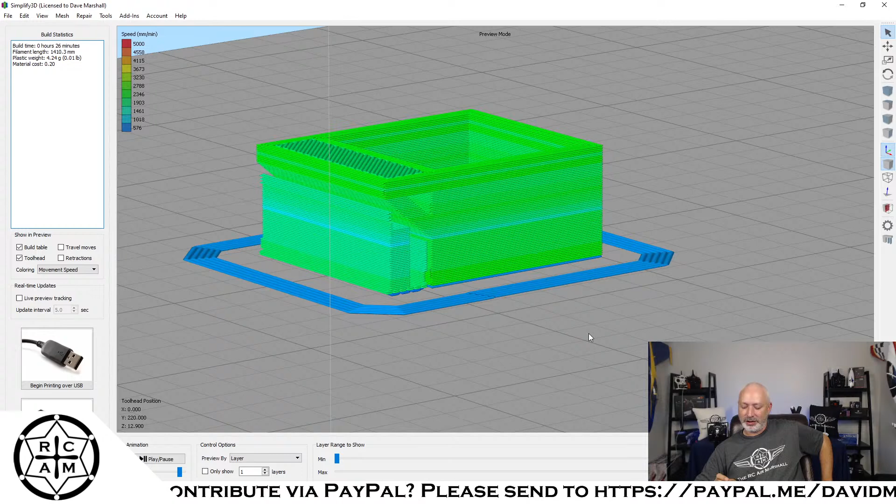When I take it out and fly, here's the thing - it only takes 30 minutes to print. So in the event the PLA melts, because I'm just lazy and PLA is what I have loaded in there right now, and I don't want to reset up the printer, we're just going to print it with the filament that's in there, which is why everything is orange. We're going to print it with everything that's in there now and just see how it does. And if it ends up melting or deforming, I'll just make another one. No biggie.